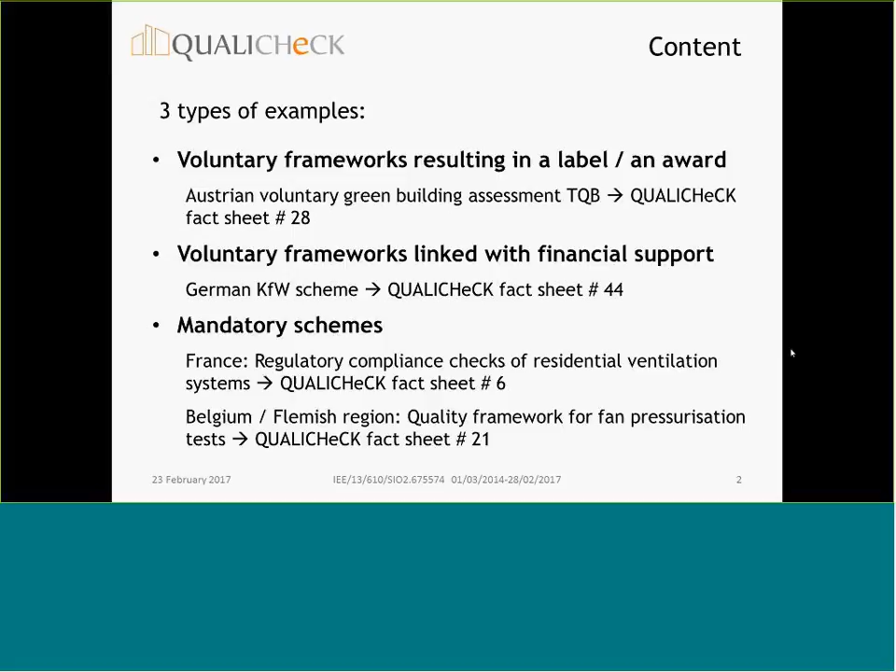The first example is about the TQB Green Building Assessment Scheme, which is a voluntary scheme applied in Austria. The scheme has two objectives: to ensure that the building was constructed according to the design, and to avoid mistakes during execution, during building implementation, and to ensure the quality of the works. In this scheme, also the first objective is quite important, because the assessment scheme also promotes integrated design. And in this case, design changes can be problematic because the design was optimized in a collaboration between architects and engineers.

The scheme consists of several assessment categories. You see them here on the screen. There are 5. Energy is among them. Other categories are, for instance, health and comfort, resource efficiency, but also economy and location and facilities. Each category is subdivided into clear requirements which can be checked. On the right side, you see an example about the descriptions, what type of evidence must be provided. So everything is very transparent on the website.

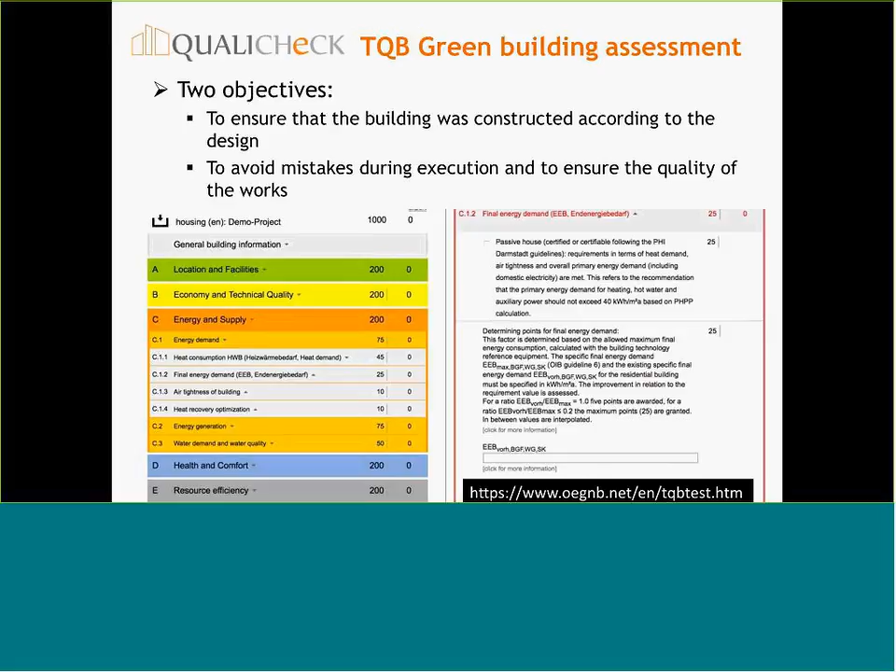I would like to show you one example how quality of the works is assured in this scheme. I present an example from the category health and comfort, and from the subcategory sound insulation. It is an example about ventilation systems. Ventilation systems with heat recovery are essential in highly energy efficient buildings. And from interviews with occupants of residential buildings, we learned that noise of ventilation systems is often a serious problem because people switch their systems off, especially during the night when they feel disturbed by the noise of the ventilation. So this seems to be a quite frequent problem, although we don't have a systematic evaluation study on this.

Switching off has, of course, an impact on indoor air quality, but also on the actual energy consumption because it disturbs the energy balance as it was calculated. So what is the reason for these inappropriate noise levels? They can be due to faulty designs, but of course also due to mistakes during construction, or both. In this case, the approach is to ensure good sound insulation in the planning stage by requesting the design material and the respective calculation. And after completion of the building, inspections and measurements are carried out and are requested as evidence for the label to be awarded. So if all the requirements are met, the label is awarded.

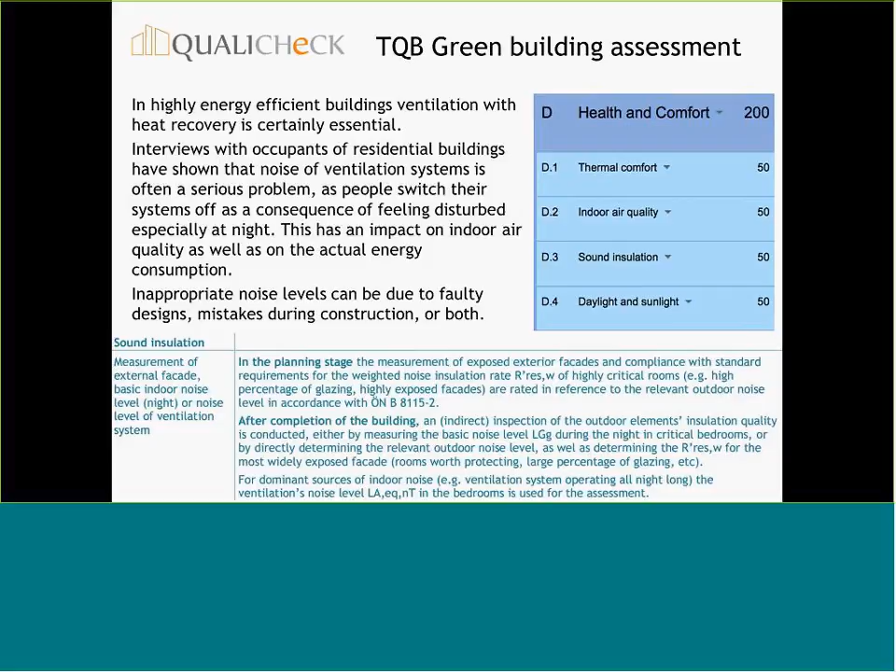You see an example on this slide. It is an example of the building Johann Böhmstraße in Kapfenberg. It was a plus energy renovation. So in fact, the building generates more energy than it consumes. It was a best practice project carried out in the research program Building of Tomorrow, funded by the Austrian Federal Ministry of Transport, Innovation and Technology. The label is also supported by the Federal Ministry and by the National Climate Protection Program.

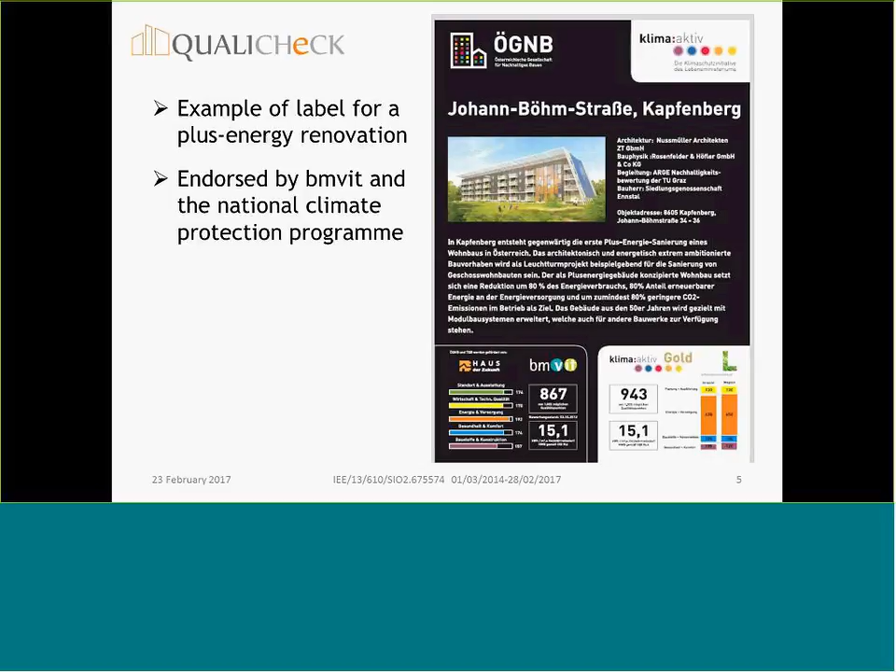The second example I would like to present is the quality assurance system of the German Reconstruction Loan Corporation, Kreditanstalt für Wiederaufbau, KfW. In the scope of the funding programs energy efficient construction and refurbishment, loans and subsidies from federal funds are granted. And under this scheme, the eligibility for funding implies stricter energy requirements on new constructions and on buildings subject to refurbishment than specified in the regulations. And to check whether the objectives are met, whether the projects are compliant, the KfW has developed a comprehensive quality assurance concept, which is shown on the next slide.

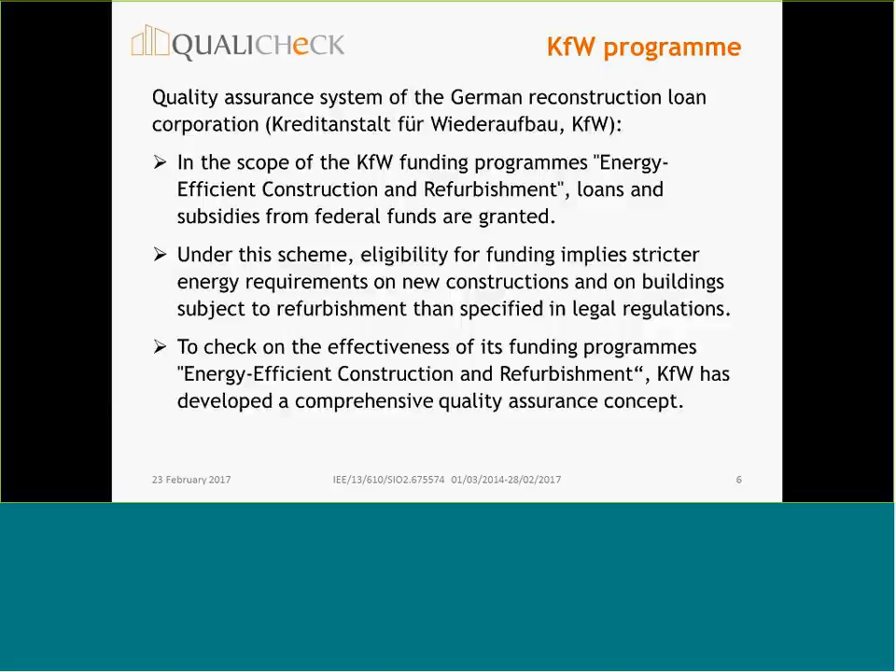So you see that the quality assurance project comprises all phases of the project, starting from project planning through application and commitment, through implementation until the project completion. There is a list of energy efficiency experts who are entitled to participate in the scheme, and there are, let's say, several quality assurance mechanisms applied. Very important is that there is a randomly carried out inspection of the energy calculation, so a random check during design, and a second random check later in the project at the completion stage. At the end of the project, there is an on-site inspection.

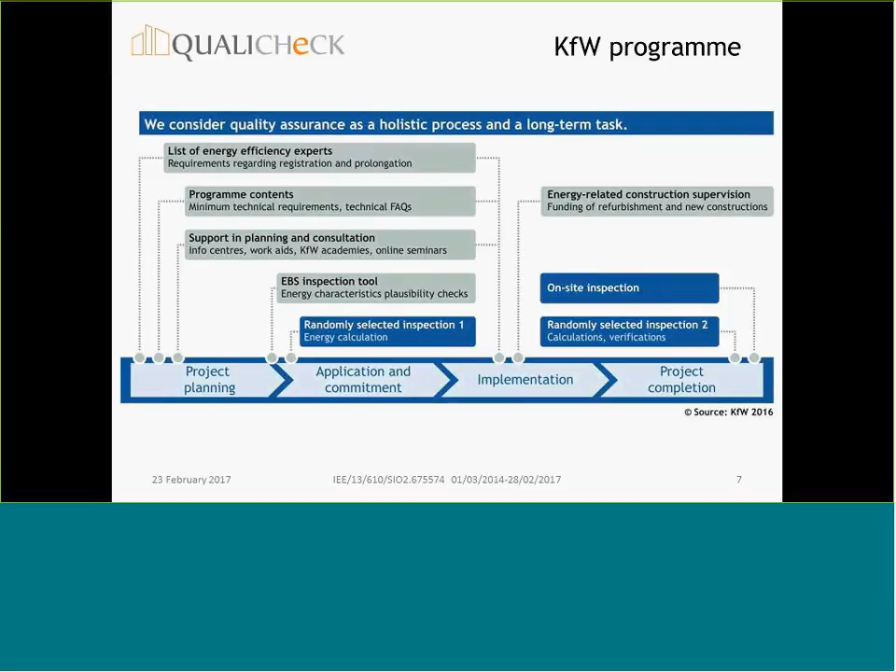Regarding on-site inspections, about 430 on-site inspections per year are carried out, which corresponds to a sampling rate of about 0.3%. What are the insights gained during the period 2013 to 2015? In fact, the evaluation confirmed that the quality of planning and implementation is very high.

In less than 5% of cases, it was revealed that the requirements were not achieved, and a cancellation followed. In fact, this is a very important element of the compliance framework, that there are clear sanctions in case of non-compliance. And it seems that it's contributing clearly to a better quality of buildings.

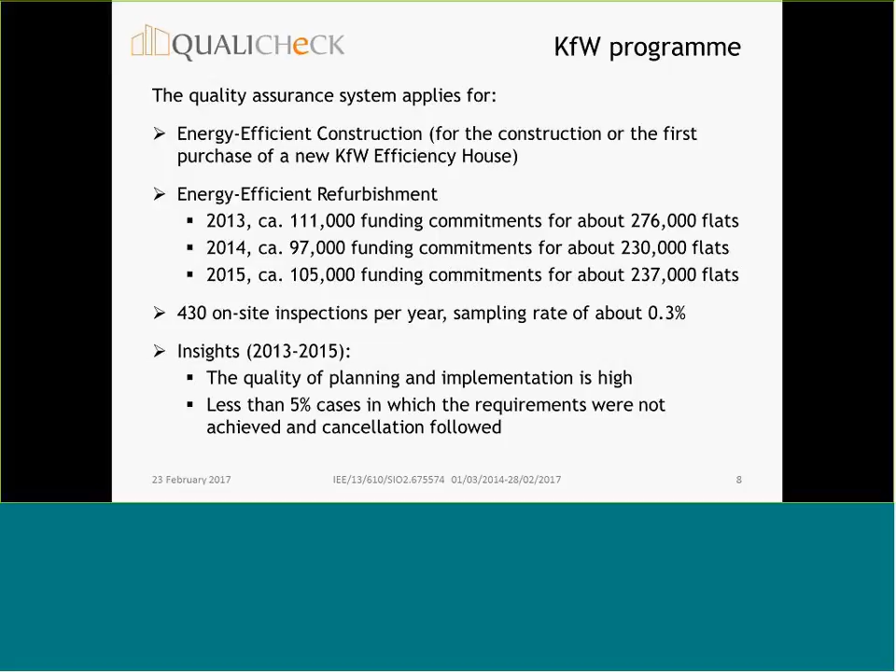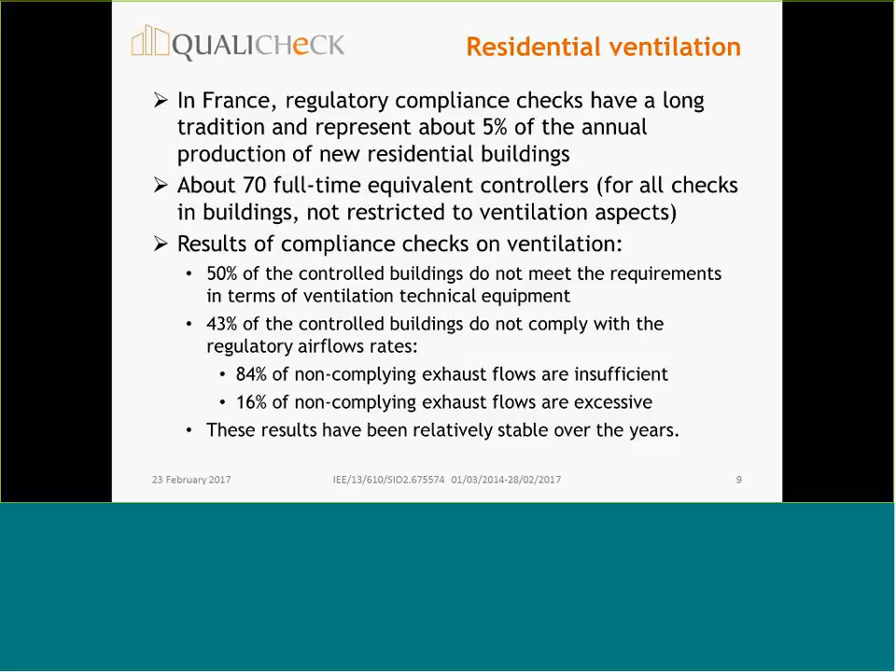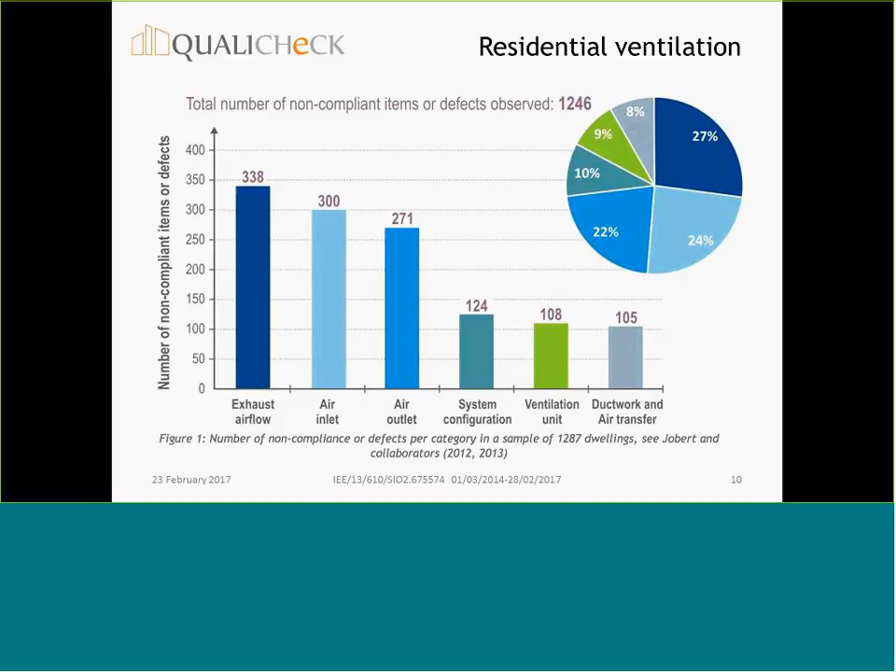So here you see some more detailed information about the deficiencies observed. I will not go into detail here. You can find more explanation on that in the fact sheet about this example. I would just like to come to the conclusions. In fact, the regulatory compliance checks performed on ventilation systems in new residences in France seem very useful to have a good picture of the status on the ground. But they seem to have little or no effect on the high non-compliance rate observed for many years. So, in fact, it is known that there are problems, but an improvement has not taken place so far.

And one of the reasons is that there is a lack of effective penalties. So this example shows very well that checking is an important element of compliance frameworks, but checking must be complemented by effective sanctions, but also measures to improve the quality of the works. And here I would like to refer to Hans' presentation he did before. So he was talking about qualification and qualification requirements, and also assurance schemes to achieve better qualification. So altogether these are very important elements to improve building quality.

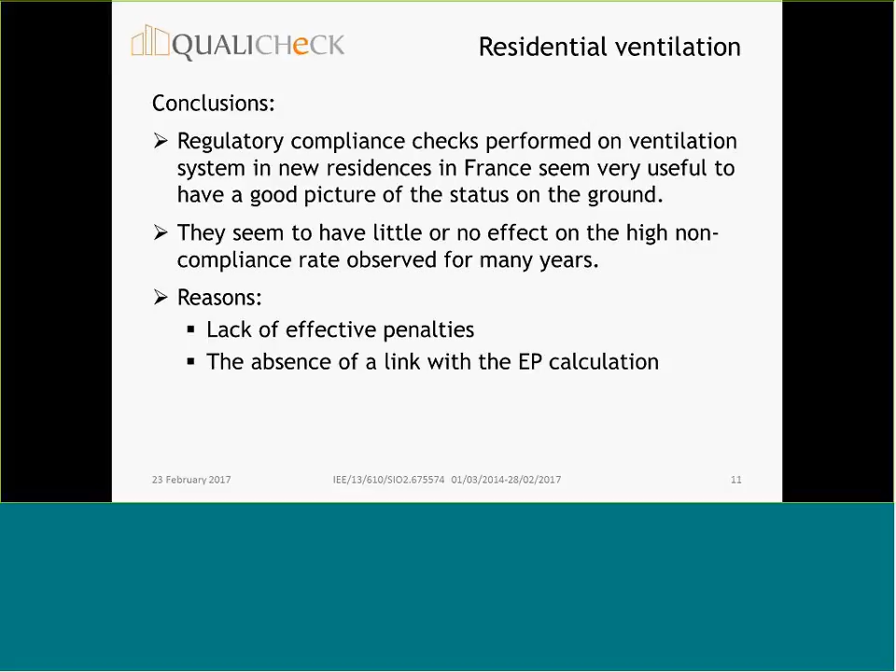In the case of France, another reason for, let's say, little effects or little improvements could also be the absence of a link with the energy performance calculation. And this brings us to the last example of this presentation, which is the fan pressurization tests carried out in the Flemish region in Belgium. In this case, there is a link with the energy performance calculation, which could also, let's say, trigger improvements.

So how is the situation in the Flemish region? Airtightness of the building's envelope is taken into account in the regional energy performance regulations. In case there is no test, then the calculation must be done with quite unfavorable default values. But if a pressurization test is done, the test results can be used as input data for energy performance calculations for new buildings like residential buildings, offices, and schools. This has quite an impact on the energy performance calculation result, namely up to 15% difference.

Which means, of course, this is a motivation for people to do the air pressurization test because the EPC result will be better, or it will correspond better to the actual building performance. In fact, there was an increasing number of tests, and in this regard, quality assurance is very important to ensure correct test results, and to contribute to the quality of the works, because, let's say, the situation is described as it actually is.

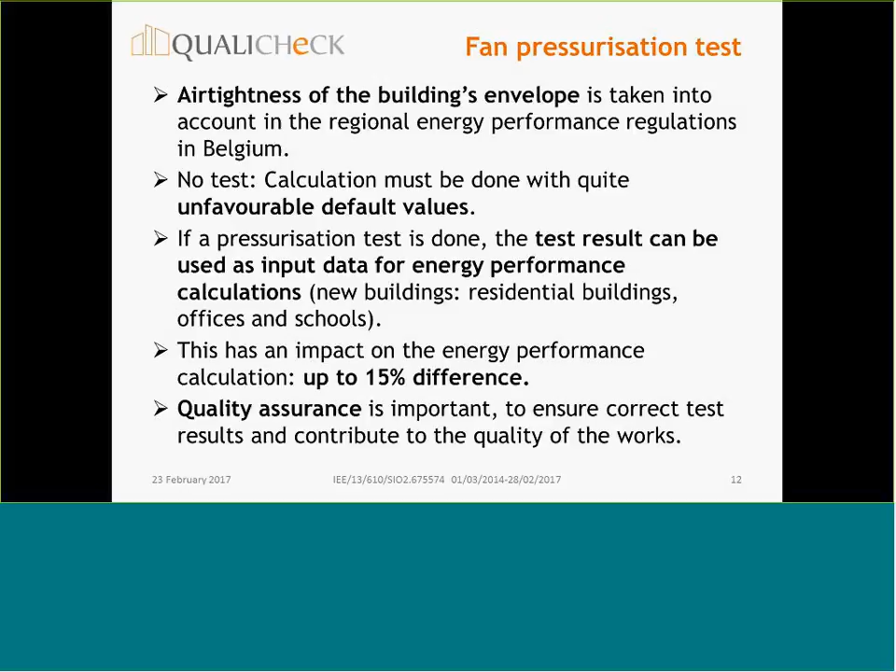How does this quality assurance look, or how is it set up? So, in fact, there is a strong emphasis on the qualification of testers, so that they apply the method correctly, and there is a comprehensive control system regarding the test reports, but also regarding on-site controls during or after the measurement. The basis of all this is a dedicated web application which must be used. So, if a test is going to be performed, information about the test or about the measurements must be given at least 1 day in advance through the web application.

The test reports must be uploaded, and also controls are organized at that stage. The result is then, if all the requirements are respected, a declaration of conformity generated by the web application, and this is needed as a proof for the measurements to be used as input data for the energy performance calculation.

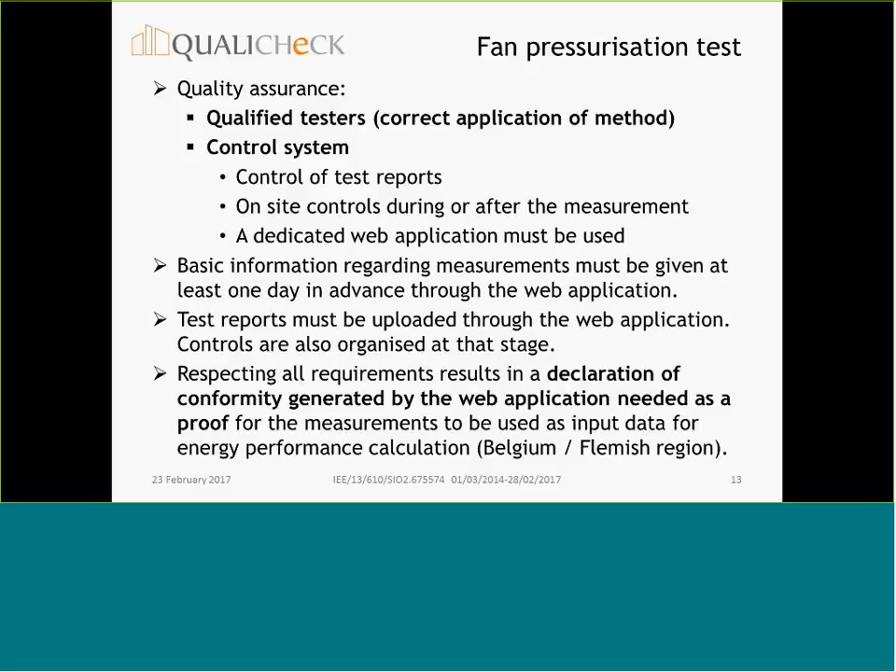So these were a few examples about compliance frameworks. You find more information on these examples in the respective fact sheets. And of course, you find a lot of other examples in other fact sheets. You find them on the QUALICHeCK website.